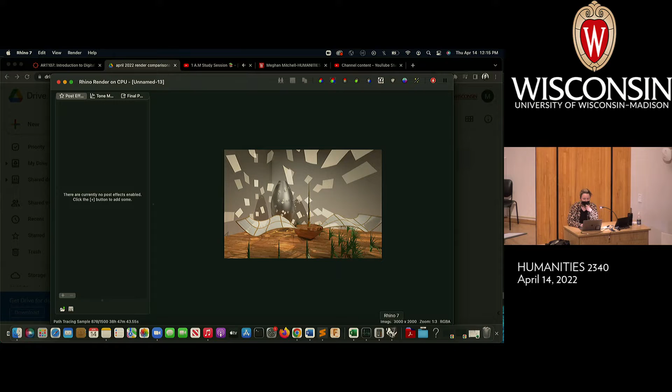Let me go into Rhino real quickly. I'm going to just go ahead and suspend this render. Yes, I would like to stop. I do want to show you this—it's going to take a second to finish.

You'll see here there's this parameter of a path tracing sample. I have it yanked up super high right now, so it's 1,500 ray trace steps. Basically what ray tracing is like: the computer says this light comes from here, then it goes to here, then it bounces here, then it hits glass, then it hits me, and it does that for every single photon in the whole scene. So the way the Rhino render works is it takes that bouncing process—people call it ray tracing—and it cycles multiple times, then it averages the results.

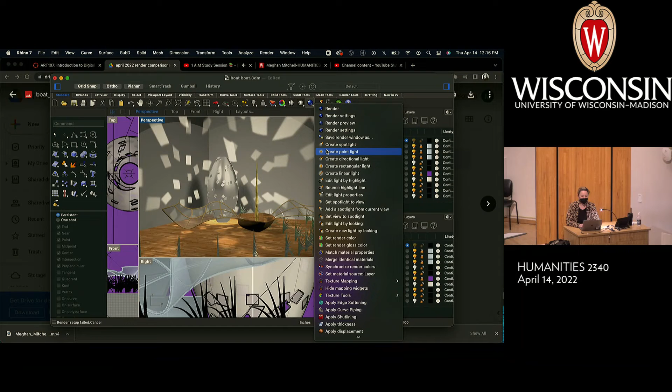So the more samples, or the more path tracing samples you have, the more sharp and tightly organized your image will be. If we go in here to render settings...

Full disclosure, I've had a couple of issues recently using the render settings here. When I click this button, it doesn't actually open up the render settings. There's a much more foolproof way to do it, which is to go up to the render menu and click render settings. So if anybody has that problem of not being able to access the render settings, that's the fix I found. So here I have Rhino render checked.

I don't really get into the specifics of that number, like 1,500 bounces, since it isn't really visible to me when I come in here. It's really dictated by whether you're in draft quality, good quality, or final quality. I'm pretty sure draft quality is 500 bounces, good quality is like 1,000 bounces, and final quality is 1,500 bounces.

So does it make your image better? Sure, to a point, but if it looks great at 500, why would you do 1,000 more? One thing I noticed doing the Rhino render on the higher resolution one, which took quite a bit more time, was that as it got into the 500 to 800 bounce range, I felt like that's totally good enough. I could just stop there and it would be beautiful.

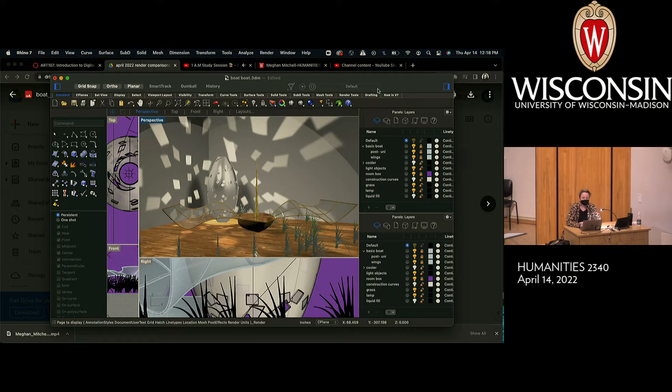So that's a couple words about the different rendering models. In general, I'll give you another look at this. The Rhino render produces what I'd call a totally satisfactory result - it's a little bit more contrasty, from dark to light. When we look at the ray traced render, it definitely has more of a modeled, smooth light appearance.

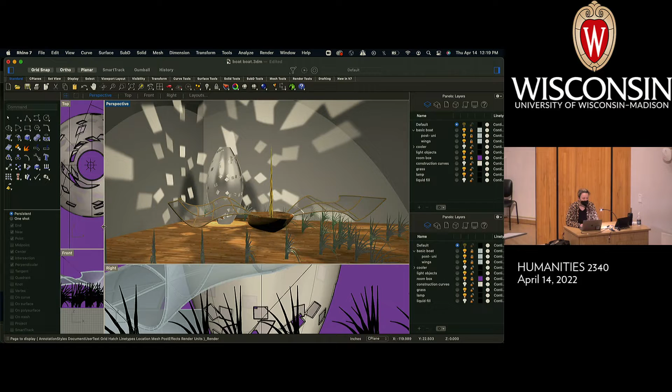Your choice. Now there's one other issue somebody mentioned to me online that I can't replicate directly, but I can describe the problem, and then show you my personal fixes, because it's definitely a problem I've had before in Rhino.

So that problem is basically: you do something in Rhino, move stuff around, maybe doing some process, or just panning through the view, and all of a sudden components of the model you've created start dropping out or failing to display. That is a thing that happens - I've seen it many times. Usually there are a couple of solutions for that.

I have 3 solutions. One is to actually pan so that there's nothing in the view, and then pan back to where you were - sometimes that's just enough to refresh the pixels. Take heart that if that happens to you, your model is not messed up. It's totally a screen, graphics card issue that Rhino has, so there's nothing wrong with your model, and it's nothing that's going to hurt your model.

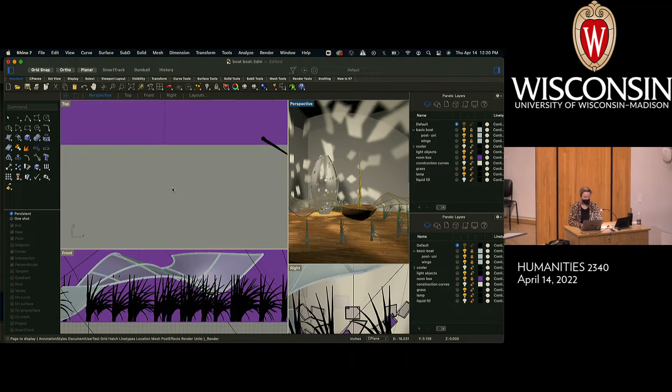The other thing I would consider doing, if that sort of panning approach doesn't work, is even maybe a zoom selected to rearrange the pixels on the screen. The other thing that can help is if you right-click within the window.

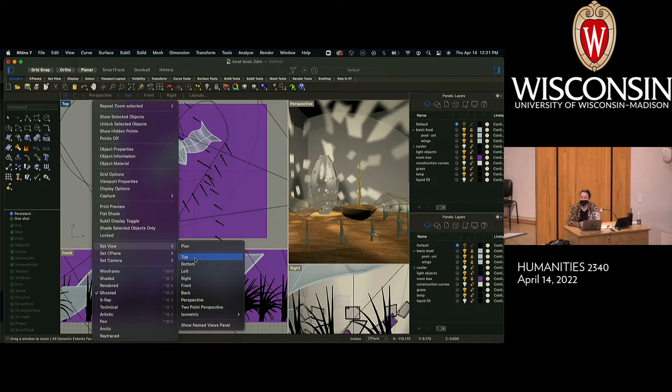Right-click or control-click within the window and do set view, then reset your view - you can reset it to top, bottom, etc. So here we can reset it to top. That will potentially refresh the screen buffer. The other thing you can do is restart Rhino.

That's it - 1, 2, 3. Those are the 3 things you can do. Hopefully the first 2 are much nicer, and the third one is kind of annoying when you have to restart Rhino.

What I've heard from other people, and actually from the manufacturer of Rhino, is that Rhino is not guaranteed to be compatible with all graphics cards. If you have that problem, there's not a whole lot you can do - it's specific to your computer and graphics card. Using a different computer, you may have that problem less. So if you have the option to use a different workstation, and if you're continuing to have this problem, maybe try reinstalling Rhino, or potentially, if you're on a PC, reinstalling your graphics card drivers. Those would all be options, though kind of labor-intensive, advanced options.

So, another request from online - someone said, hey Meg, can you go over making a 3D print again? It just so happens we have a couple of 3D printed objects here in this scene. If I go through and think about what is 3D printable here, certainly these little grass clumps would be printable because the spire they originate from is fully solid.

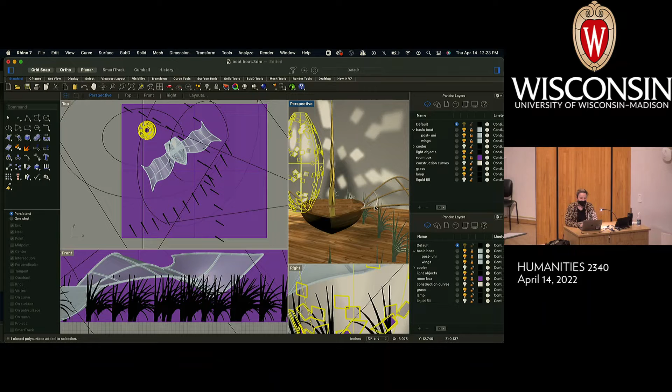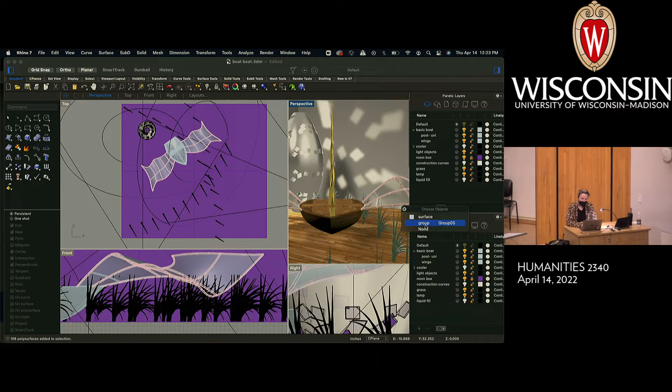The bottom part of the boat would definitely be 3D printable. Not so much this area - we'd just have to make a couple tiny modifications. I would actually take these poles... the only issue here with the wings on the boat, there's maybe a couple small things I want to point out.

This surface is a single surface, so unless we extruded it to have a tiny bit of thickness, it would not be 3D printable. When I was designing it, did I care? Absolutely not - I was designing something for the screen, so it doesn't really matter. But if we wanted to make that 3D printable, we could potentially just add some thickness to it.

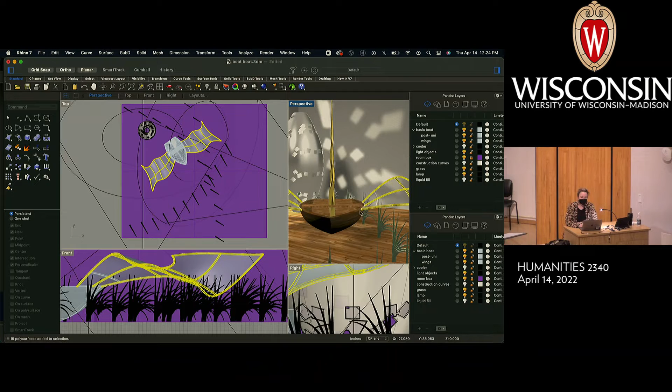The other thing that might be an issue is structural - having these be sort of larger than the boat itself, and not having a whole lot of material connecting them to the boat, they would have a tendency to just pop off if 3D printed. So I would rethink the design a little bit and give it a little more oomph, maybe a little ramping object to hold them to the side of the boat, like a cornice or something.

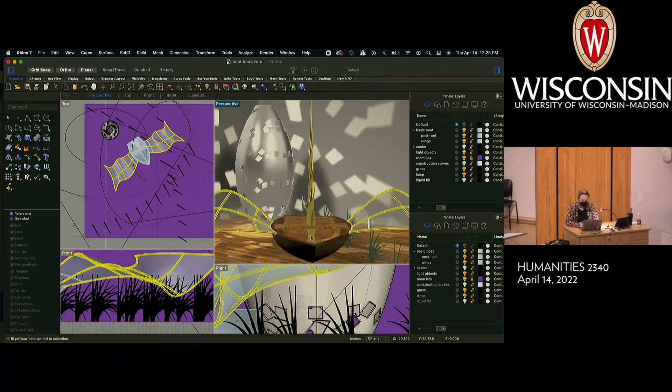The frames themselves are actually fully 3D printable. I just think printing this entire thing would be pretty fragile because they would be literally suspended in the air, just waiting to break off. The interior of the boat, though, is fantastically 3D printable - no problem there at all. And this lamp thing is also 3D printable, so I think I'll use that as my example.

I'm just going to open a new Rhino file.

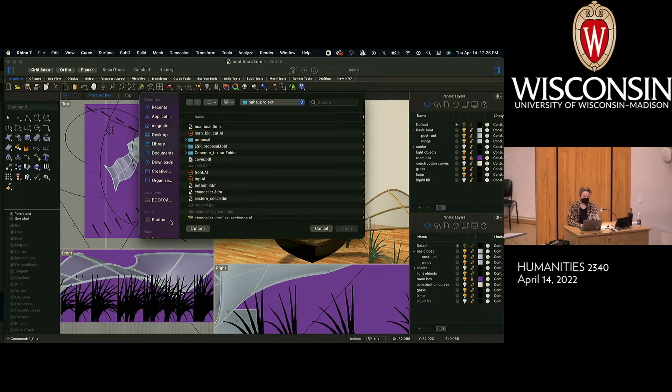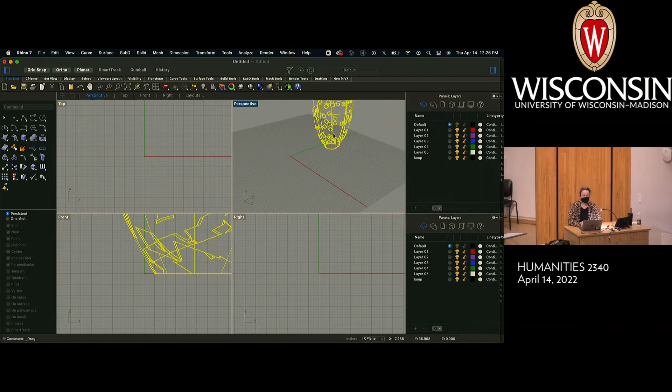You don't have to put it on its own file - we could just select it and use the export selected method. It can be nice to put stuff in its own file when 3D printing, because then you can scale them to a certain scale. I'm not going to worry about that too much, but anyway, this is ready to go - we can save it as a 3D printable format.

Sorry, my trackpad skills are like trash today. I don't know what is going on. Yes, please. Okay.

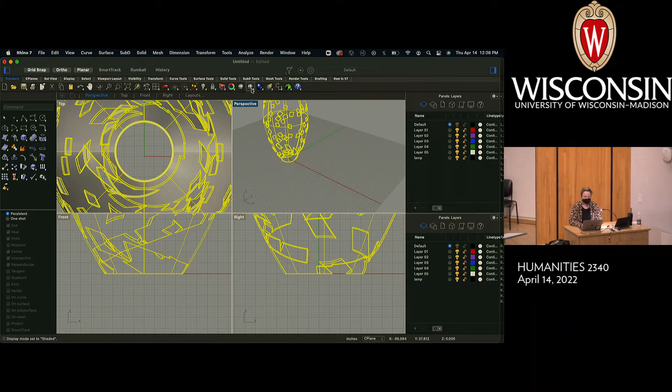So this is totally 3D printable. It's got some holes in it - that's absolutely fine. You may recall that instead of having it be a single surface, we went ahead and shelled it before we poked the holes through it, so you can see it's got this thickness to it. It's not some lonely surface that's a figment of our imagination.

So all we have to do is select the object in any file - it can be a file with lots of stuff going on or nothing going on, like this file - and you want to go to Export Selected.

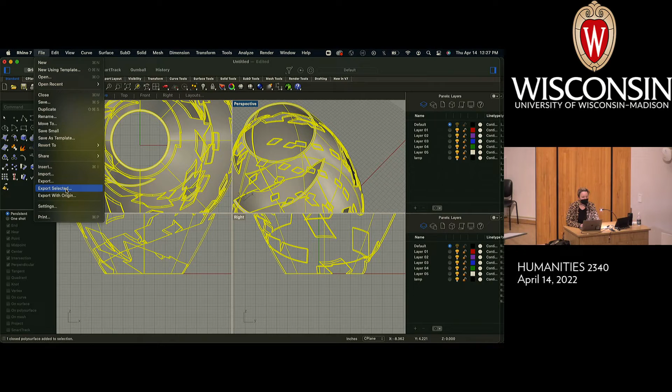You can also just do a regular export if it's the only thing in the file. I'm just a little bit superstitious about that because some 3D print softwares, if there are any curves or anything like that, they'll reject the file. So it's just my own kind of hang-ups, I guess.

So I guess I could call this maybe lamp. That's super creative. And then under the format, this is the part that really matters.

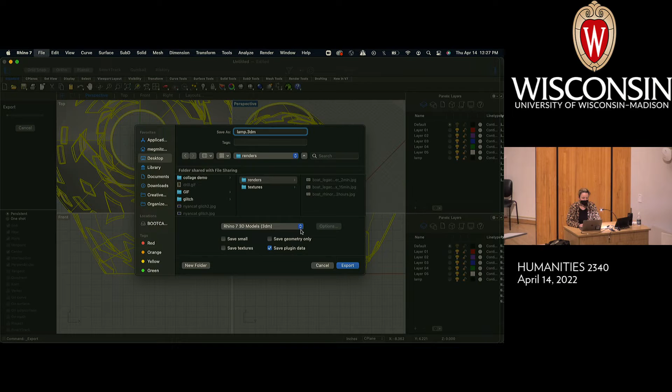Stick it there. And we want to not export it as a Rhino file. We want to export it as an STL file. So STL is sort of like the universal format for 3D printing.

If you are working with Shapeways or some sort of very contemporary 3D printing software, you may also have the option to use an OBJ. Is there any difference in those two file formats?

Yeah, I mean, in this case, we're just saving geometry. STL as a file format is only capable of holding geometry. It doesn't hold textures or color or anything like that. OBJ can actually hold a material file, so you can actually save the material with the object. That can be kind of cool if you want to maybe stick it into some other design sometime and have a material come along with it. Usually when you send it out for 3D printing, they just discard the material file. So we're going to use STL because that's the most common.

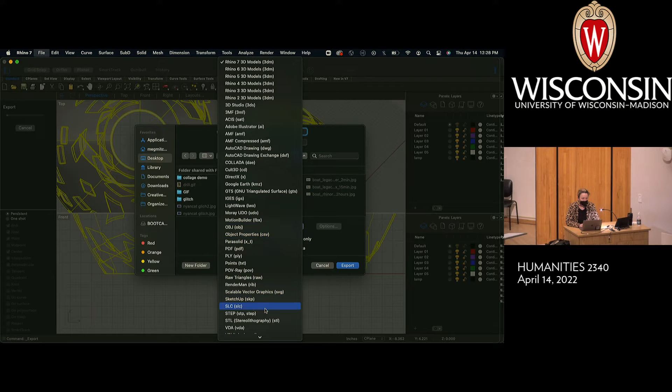And export. For tolerance, you may want to hit the preview button and kind of think about it. So here, you can kind of expand the window, and you can think a little bit about your tolerance. So it looks to me like, based on the preview that we're seeing right now, that some of these areas - it looks, this is not a technical term, but it looks a little chunky, meaning that these large chunks could potentially be visible when you 3D print it as flat spots.

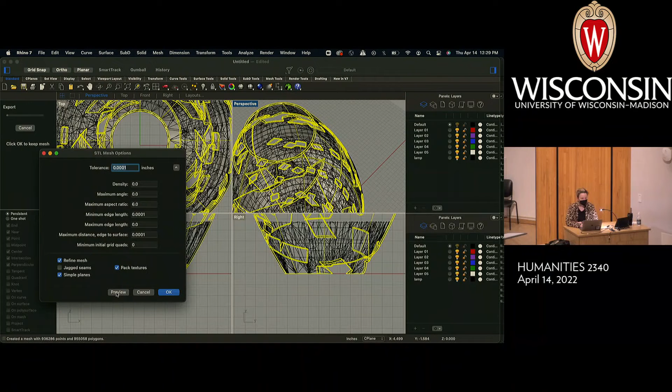So if we turn the tolerance to a smaller value, give it an extra zero, we can then probably get a much more high-resolution mesh. So you can see now we're in super high-resolution zone. I think the guideline that I gave you all on the 3D printing document was something like that for large objects, which this is a large object right now.

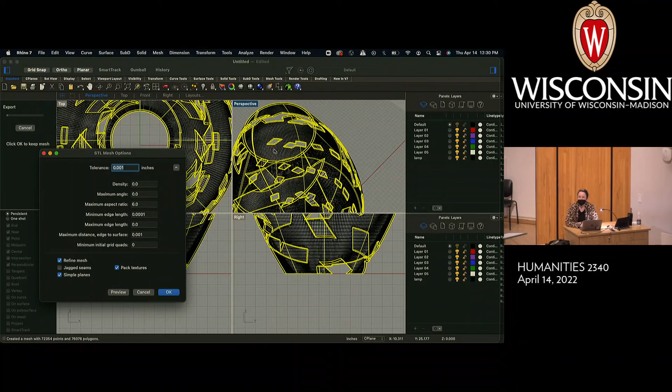So basically you're kind of just looking for it to look like a fine mesh. You don't want it so fine that you can't see the individual faces, because then it's just going to make a giant file that's really cumbersome, and it's not necessary. Because as you all know, 3D printers have their own kind of resolution, right? There's only so much detail that a 3D printer can capture. So having a file that's a billion megabytes large to capture all this smoothness, it sounds like a good idea, but the 3D printer is not going to be able to replicate that. So you're kind of just wasting file space.

So yeah, this looks like a very kind of high resolution mesh right now. So you can just click OK.

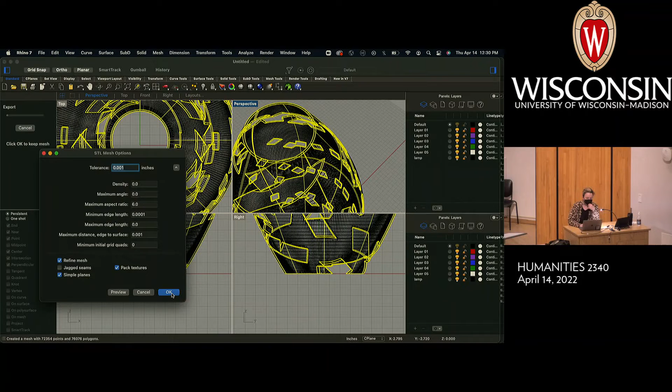And it does give you this a couple of prompts. So it asks you whether you would want to use ASCII or binary. For 99% of people, it makes absolutely no difference. The only reason why I would ever use an ASCII STL file is if I'm writing code to control it, and I want to actually read the file with code, because then with ASCII, you can actually do that. With binary, I guess technically you could do it with binary too, but then you'd have to make a binary interpreter, and that would be terrible. So for regular old 3D printing, it does not matter.

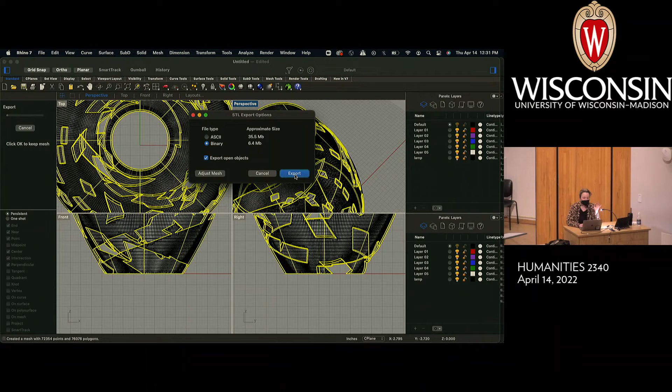So export. And I should be able to now find it. That would be a miracle. Let's see.

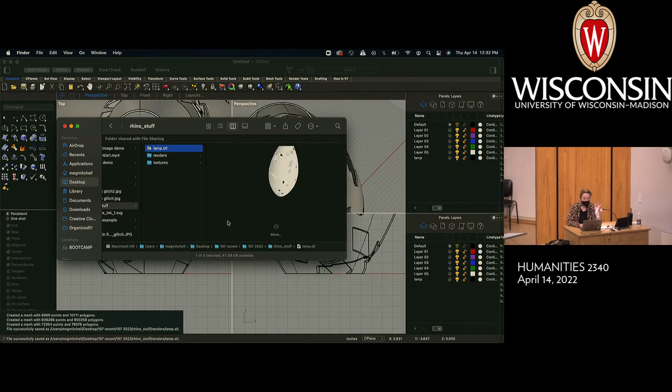Okay, so here's my file. You can see with STL and OBJ, Mac OS actually does a pretty good job of previewing them in the Finder now. Yeah, here it is, fully 3D printable.

So the other reason why this would be a really great 3D model from an economy standpoint, as opposed to all the other objects we looked at in our file, is because it is hollow. And how are you billed when you make a 3D print? You are billed by volume of material, so this would also be potentially the cheapest 3D print, would definitely be the hollow one.

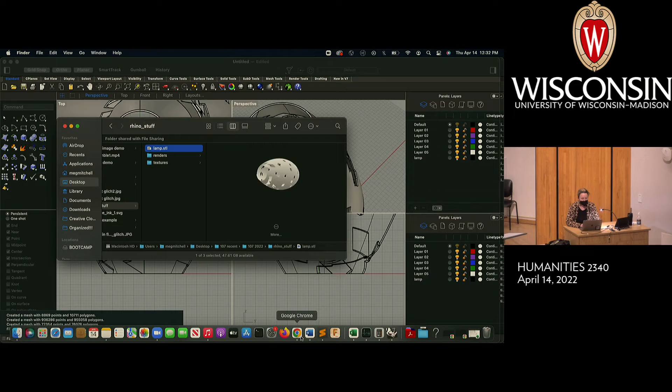So I'm going to go ahead and just show you where Shapeways is. So then to make it, you can either go to your local makerspace, or my recommendation would be to go to Shapeways and create an account. It's super easy, you just upload the model, put in a size, and it gives you a list of materials that may be compatible with the design.

Obviously, I'm not asking anybody to 3D print in gold, although that can be really super fun if you have a special person out there. But yeah, just whatever the economy material is, it's usually sintered white nylon, which is the most economical, and that would be totally fine for the extra credit point.

Okay, so those are my online questions. Do I have any questions from the people here? Yes.

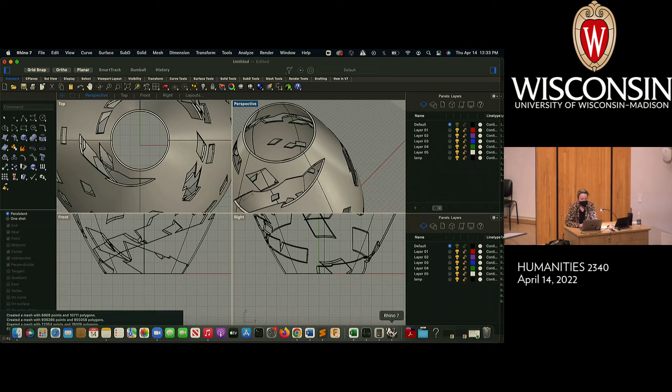Colored lighting, sure. Yeah, so in fact, I totally made a version of our file that had colored lighting at home, and then I kind of, for some reason, decided not to use it.

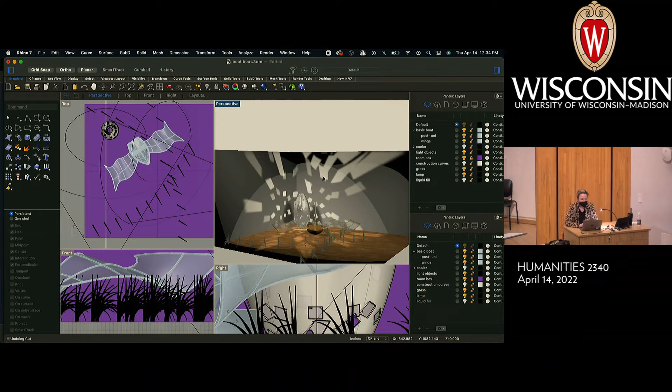Okay, so probably, in my opinion, we've got a couple of opportunities for colored lighting in this file. So let's start with these two spotlights. If you select the light, you should be able to come over here to the side panels.

If anyone has not gotten annoyed by these yet, boy, you're lucky. How do I switch to the panel that's supposed to pop up when I get a light? If you click this button over here and just show properties panel, it'll pop up. So that's kind of annoying.

Anyway, so yeah, you just click on the color, and you might notice I have a bunch of colors already saved down here. So maybe I want something sort of just warm - this will just add a tiny bit of warmth to the affair. So I'll do that one. That's pretty subtle. I might actually choose something less subtle because we're on the projector.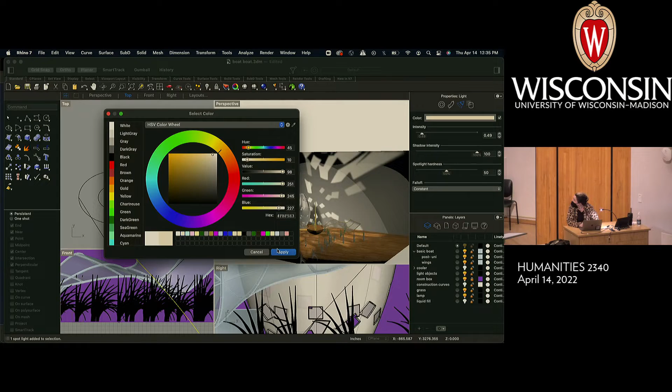Maybe this one, yeah. Okay, so now I think you've got a much better idea of what that might look like. So it's super, super subtle. I'm going to choose something a little bit less subtle for this other light.

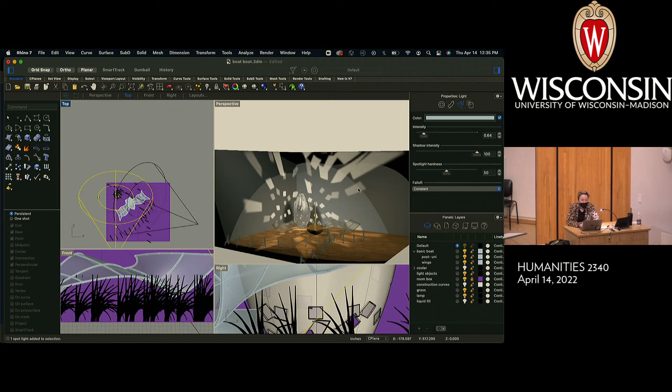Using kind of some of the rules of color can actually be a big benefit here. So in this case, we have a warm and a cool light that are sort of converging on each other. And that can be really interesting because it can kind of add some dimension to the objects around it.

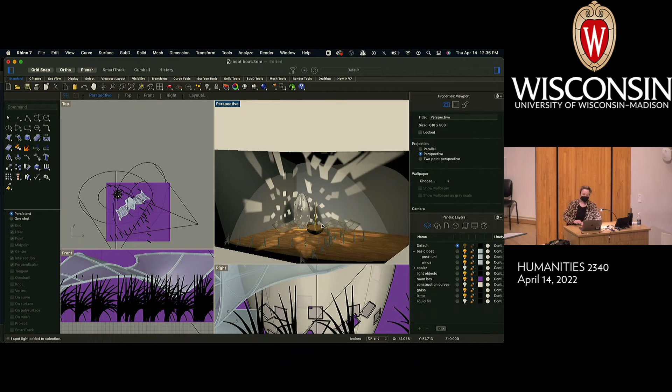Let's see, if we want to choose something way less subtle - you know, I'm not even 100% convinced that we can see that on the projector, but I'm sure it'll be visible in the video. I'm going to go ahead and get rid of some elements so I can select the lights a little bit more easily. I'm going to get rid of the boat.

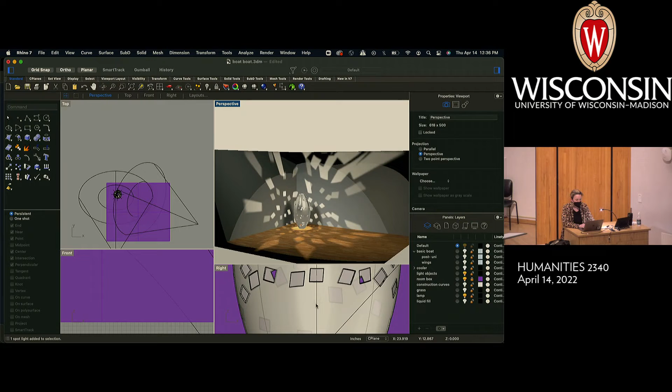What the heck, I'll get rid of that too. Now, I just wanted to get to a place where I could sort of select these objects easily. So it just so happens that there are 3 point lights inside this sort of lamp object.

And if I wanted to get way less subtle, I can probably select some forms that will - okay, so my intensity here was down all the way. So you can see now if I roll it back up, it's kind of, you can definitely see that pink coming in there, right?

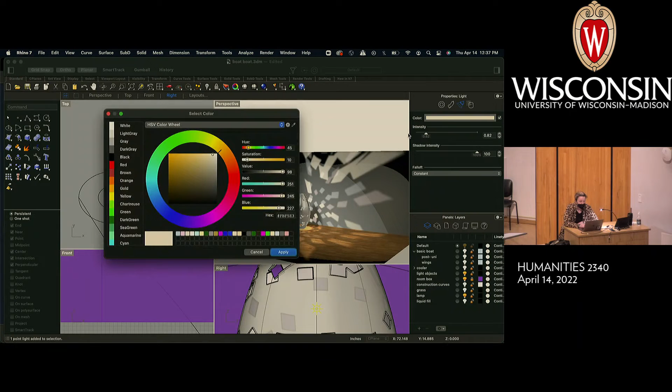And then if I just move up and down here, I've got 3 point lights, I believe. So it'll pop up again in the panel here. And then maybe here we want to add some blue. And then up here, let's add some yellow. I want it to look really warm, so I'm choosing like the brightest yellow I have.

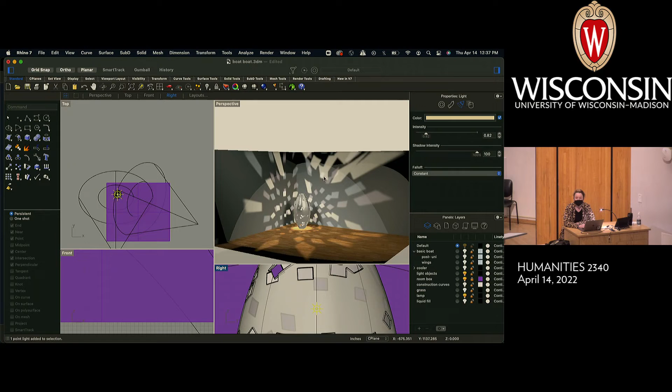So now you can kind of see we have this like kind of confetti look going on. What you will notice though is that in some of the areas where the light is sort of doubling up, you can definitely see there is color mixing happening. So if I bring in this area, these areas are for sure doing additive mixing.

So yeah, I think color in general, color in the light, can be really exciting. I've seen it used in a lot of different ways. I mean, people can definitely, like if you're making an underground lair or something like a dungeon, you can have like green or red lights, and it gets real super weird. So that can be kind of fun. Other questions? Yeah.

No, I mean, what do you mean by produce light? Emissive, yeah. No, that is totally a thing that you can do.

I probably just haven't gotten to it because it's a little bit on the advanced side. But yeah, the point light is probably like, I like using the point light because it just goes everywhere and then you can constrain it with an object or with something like that. Making an object into a light source is totally something that I would do.

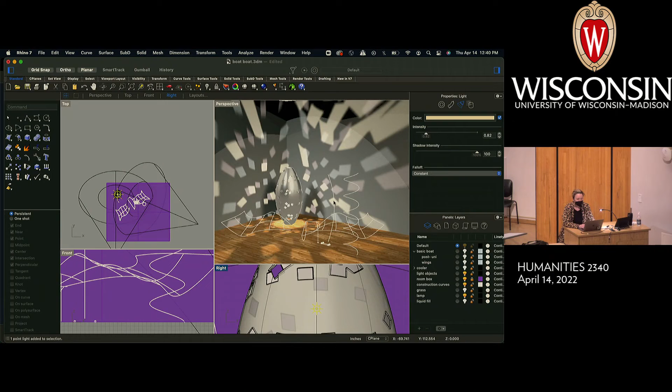So I'm gonna go back to my construction curves. I haven't had an opportunity to do that yet, so it's like justifying my whole existence. Basically, it looks like I have a construction curve right here that I could sort of recreate the lamp with, so we can do that.

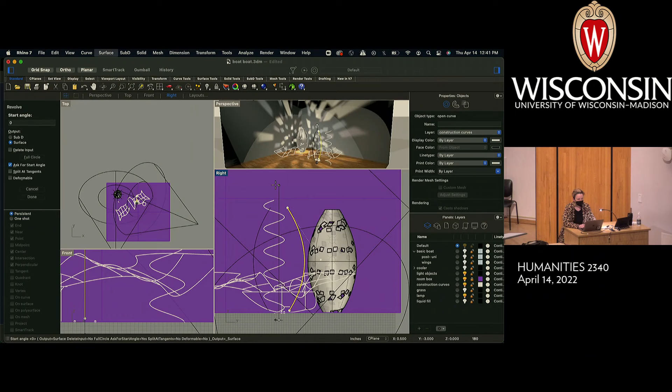So to do this lamp, I first used the Revolve function in the surface menu, and I sort of just picked a random point. I'm just using the ortho right now, and I'm going to do it on full circle. I can't promise it'll look exactly the same because I didn't measure or anything.

But basically, what you get when you revolve is sort of like what we were talking about in the 3D printing section just now. You get this wonderful object that's actually not 3D printable because it only has a single fictional surface boundary. So what we need to do is make this into 100% solid.

So I used cap planar holes, and that puts a cap on the top and bottom to turn it into a solid. And by the way, if I actually wanted to just take this object as it is now and intersect stuff into it, that would be completely legit. It was just kind of a design choice along the process that we would hollow out the top and bottom.

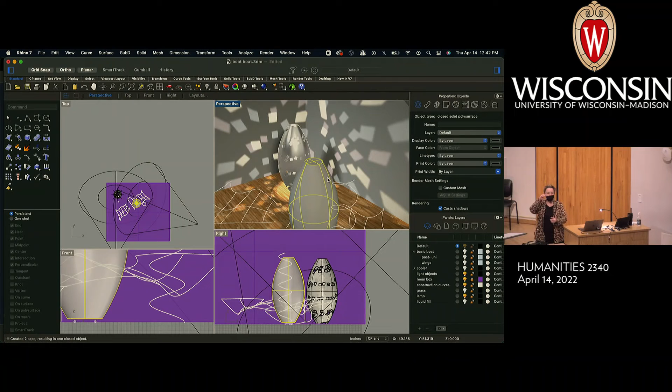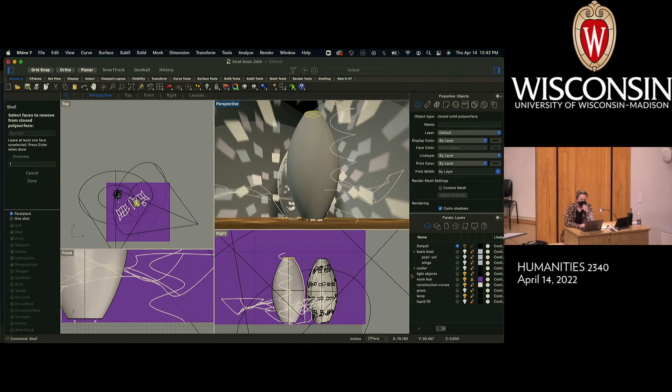So to do that, you use the shell command and just hit enter. Then it asks you to remove certain faces. I definitely want to remove this top face, and it would be nice if I could remove the bottom face too. So I think probably just getting rid of that will allow me to do that.

There we go. Here it's asking me for a thickness parameter. You may remember that this grid was about 1 inch for every large unit, so probably somewhere between 0.25, a quarter, and an eighth would be a nice thickness. So I'll give it 0.125.

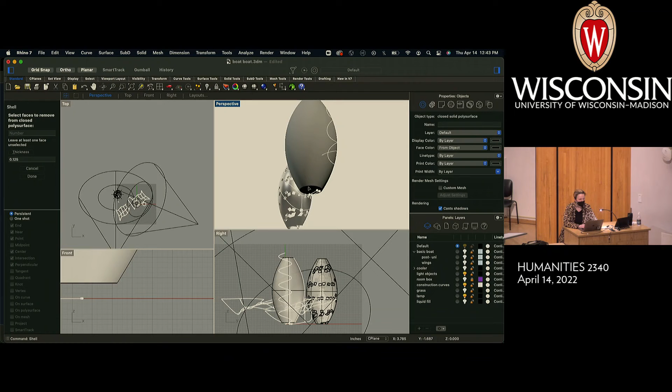Then it asks to select faces to remove. So I'm going to actually select, everything apparently. I'm going to go back to that function just by hitting enter, and it asks me to select the faces that I want to remove. So these would be the faces where they're completely open. And I still had the parameter in there for the 0.125.

So now this is at that phase where, after this, we joined the poking through crazy objects. Seven minutes left. Any questions? I'll take a question in the back because I haven't gotten one from them.

Okay, so that's a fantastic question. I have a couple of ideas.

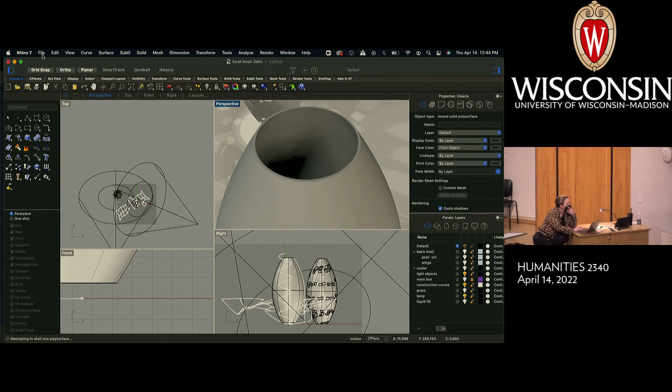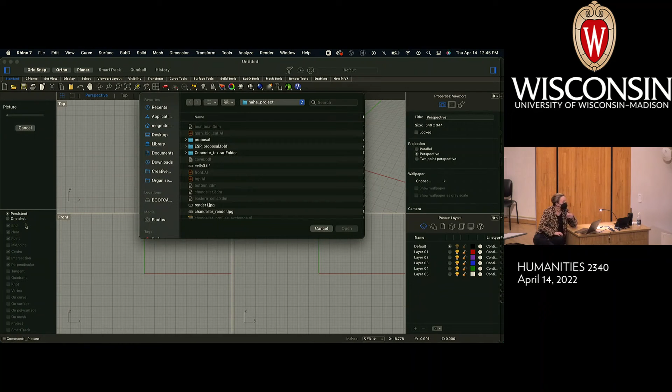So one way to think about making a surface... actually, let me make a new file here. If you look at this menu, you've got all of these options. And it sounds like what you're asking about is maybe more complicated, because we've been over a couple of options but these don't sound like what you're looking for. Like options like Revolve, where you can start with a curve and then extrude it, and those are good for making sort of sweepy curves or that sort of thing.

You could certainly make a surface from control point grid. In this case, it lets you set points like rows and columns, which as you're kind of doing it, you're like, well, that doesn't sound very interesting. Like, I don't want a table, but it's not going to give you a table, don't worry. So here we've got number of points in row, maybe let's just set that to 10. And then number of points in column, you can set that to 10. And then it asks you to draw the points, and I'm just clicking through.

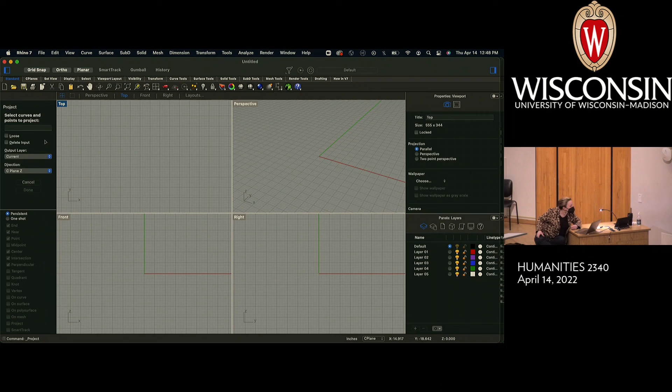Just going to go to the regular surface menu here. Okay. You know what, I might have to do a tiny bit of research on that, but I can definitely find the answer for you. It's some version of like a patch or a drape. I'm just not seeing it in the surface menu now.

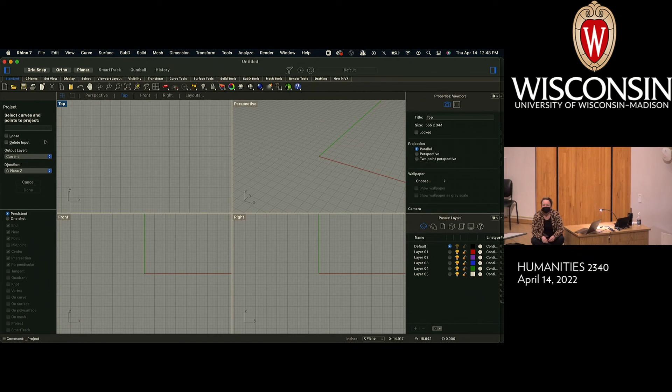I can either follow through with you over email, or we can just think about it next class. Probably thinking about it over email would be better, because we'll be in code next week. But yeah, I can definitely figure that out for you.

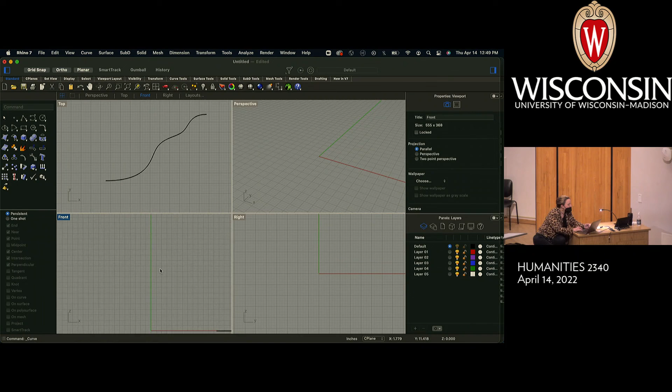Oh, you're asking in reference to that question? Sure, yeah, you could definitely use sweep rail, which we've kind of already done. So we can demonstrate that super quickly. I guess I sort of think about that as not exactly what she's asking about, but yeah, we can definitely think about that. So if you make a curve, and then you make another curve, like right here, I can just make another curve that's sort of touching it. And I'm going to disable ortho temporarily so I can make a little quick curve.

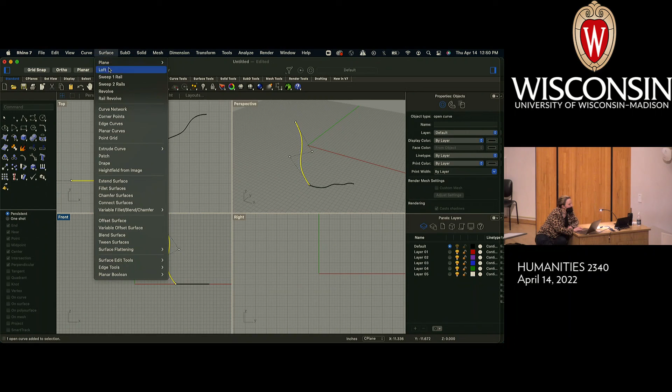So the question was, could I use a method like sweep rail or something like that? And yeah, you definitely could, and you would get a certain result. So here, you could use sweep one rail. This would be the object that we're sweeping, and this would be the rail, so this is the sweep shape. Hit enter, excuse me, so sweep shapes. And then you get something that looks like one shape was sort of moved against another shape. That's sort of, I think, maybe what you're looking for.

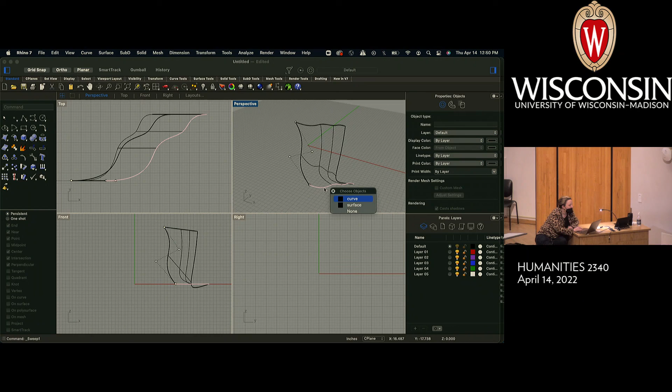But the other thing I wanted to point out is that if you do get a surface like this, you can also turn on the control points, and then you have all these points that you can mess up. So what I was trying to do was create a situation where you had maybe like 100 of those, that you could lift and move according to your will. So there is an option in Rhino to create a grid of these that you can sort of just pop up and down. I think it might be some patch or drape. I would just have to try them and check it out.